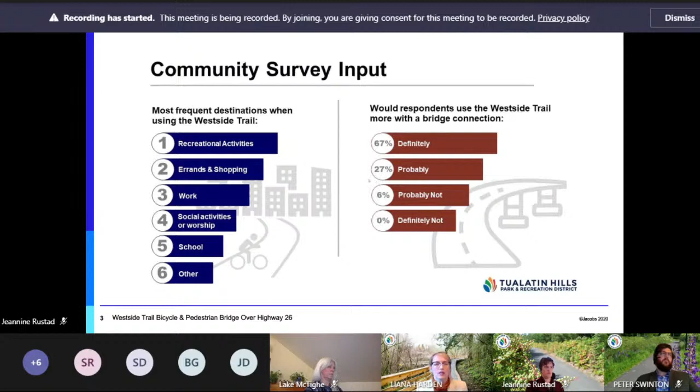Generally speaking, we didn't get a lot of negative feedback about the project itself, although we did get a lot of really good input from the community about some specifics they wanted to see if the bridge was going to be built. So it was really helpful. I would say overall, though, we did hear a lot of comments in support of the project, so I just thought I would share a few of those.

The first one is that this bridge will be an extraordinary addition to the Westside Trail system. A community member also shared that a bridge over 26 from 143rd to Beaverton could be a literal lifesaver. And another community member shared that this would be a great throughway for kids who attend Sunset High School and live on the south side of 26. So really appreciate those comments.

Not only did those comments really help inform the project, but they also helped us know we're on the right track. So as Scott moves through his slides, you'll also see some tie-in there where we heard some community input and how we're responding in the project. So that concludes my portion of the presentation.

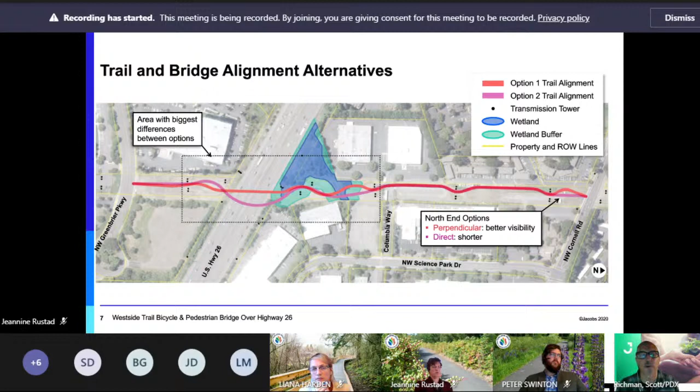So that's sort of an overview of the two options. Jeannine, if you go to the next slide, we'll talk a little bit more about option 1. I should note that the variations I talked about north of Highway 26 and also north of Columbia Way may have some refinement we can look at, but we just have these intact as options.

So trail alignment 1, we're looking at the area on top, the plan view, really looking at the crossing over Highway 26. This is all generally up on structure, elevating the roadway from grade on the south end, up on MSE retained fill walls, and then up on a prefabricated steel truss structure crossing over Highway 26, ramping down over the wetland and wetland buffer area, which would all be structure as well.

When we originally were looking at this project, I didn't realize how much structure we were talking about, and that would all be on elevated steel girdered structure, with design that minimizes the impact to the wetland areas with a minimal number of footings and locations of footings. The profile view shows that we try to maintain reasonable grades.

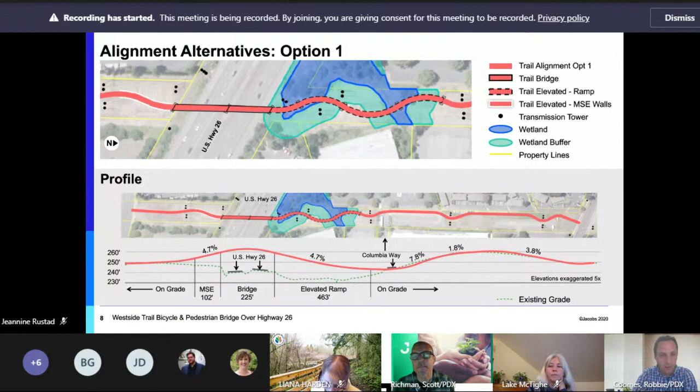And Scott, this is Robbie, I'll add on to that a little bit too. The curved option 2 also gets the majority of the bridge, the truss structure, out from underneath the power lines.

The second support in the middle of the highway and the third support on the north side of Highway 26 would both be out from underneath the power line, giving us a different option for constructability. The first option is straight underneath the power lines and would require more of a bridge launch type scenario, similar to what was just done over 405 this weekend.

From the plan view, the solid line shows the actual structure over Highway 26, and the ends of that solid line would be where those foundations would be, plus the foundation in the middle of the highway.

All right, we'll move on to the next one, unless there's another. Scott, can I jump in? Can you hear me okay? Of course, yes. Hi, so I'm Jean Senechal Biggs.

I'm the Transportation Planning Manager at City of Beaverton, and this is my first meeting of this group. I think you've met once before maybe, so I'm jumping in the middle of things. My questions are more around what's the vision and goals for the project, and how does that tie into what we're seeing here on screen for the alignment? How are we going to evaluate these, and how does it relate back to some bigger vision?

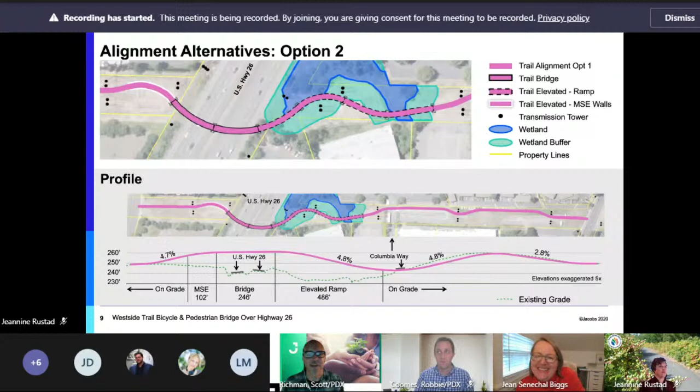Next, a private property, and the other option would stay within the BPA right of way. This gives some general parameters on differences between the two alternatives. The bridge over Highway 26 is a little bit shorter under option 1, which is straight from a bird's eye view, versus curved for option 2. The elevated ramps on the north side of the highway, as we've developed them, option 2 is again slightly longer than option 1. The retaining wall, we essentially have the same design alignment on the south side of Highway 26, so similar length of retaining walls, and then the rest of the trail.

1,570 feet for option 1, 1,580 feet for option 2, so very similar for both options. Overall, not too much difference, but option 2's overall length would be a little bit more.

I used the term MSE before this exhibit. This rendering that Toole developed shows a view from the south looking north, as the trail elevates and approaches the bridge over Highway 26. The light brown, gray colored block walls are MSE wall.

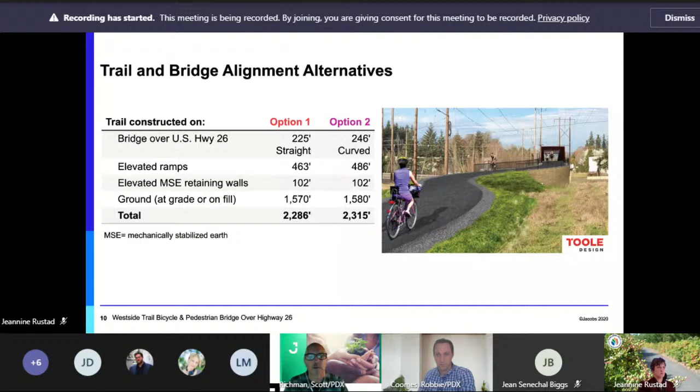We're going to get into a little more detail on design considerations. This is a Tualatin Hills Parks and Recreation District slide showing the longer Westside Trail, with this short but important link in blue. As we mentioned, it's an integral part of the trail, which is planned to one day extend from the Tualatin River to the Willamette River. It connects to adjacent trail systems that have been completed and to the broader transportation system, which is connectivity that we know is important to the region and community.

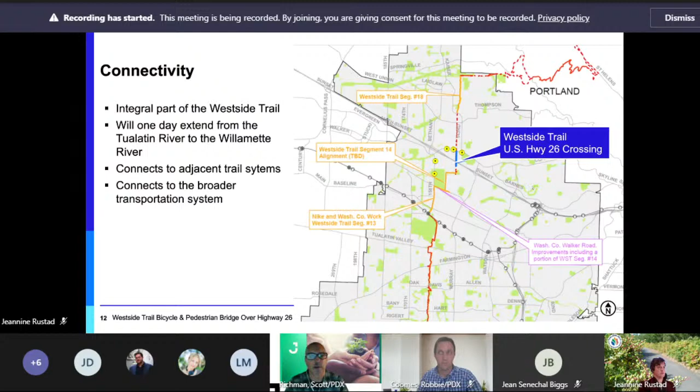One of the important elements we'll be integrating into the design as we go forward into a preferred alternative is that there are standard signs that Metro and other agencies use, and that Tualatin Hills Parks and Recreation District uses for wayfinding. The two signs on the left are signs that would be at a trail entrance or at trails for directions where there are crossings. The sign on the right is a Manual on Uniform Traffic Control Devices sign that we've all seen around in different places.

That's a directional sign that's on-street, approaching the trail access points from the streets, which are Northwest Greenbrier and Columbia Way and Northwest Cornell. We'll resolve more of those details in the preferred alternative design.

We'll go to the next one.

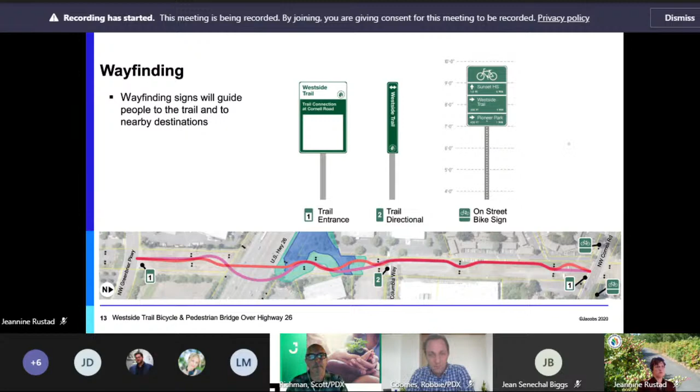I mentioned the interface between the trail and the different roadways. We know there are some potential conflict points where safety is going to be critical, visibility and signage, to alert people driving to the presence of bicyclists and pedestrians on the trail itself. The busiest roadway associated with the project that would cross is under Washington County jurisdiction, Northwest Cornell Road on the north end, with quite a bit of traffic. We'll be resolving more of the crossing details associated with the preferred alternative. So more to come, but we know there are going to be extra considerations approaching that crossing in particular. In the middle, the new trail would cross at grade at Columbia Way, which is a private access road in the Columbia Sportswear campus, so that's kind of in the middle of that.

And the intersection design at Greenbrier Parkway, the connection, which is industrial with relatively high traffic and a lot of truck traffic, and as others have pointed out, people tend to go pretty fast there. It's a pretty wide road. You can go to the next one.

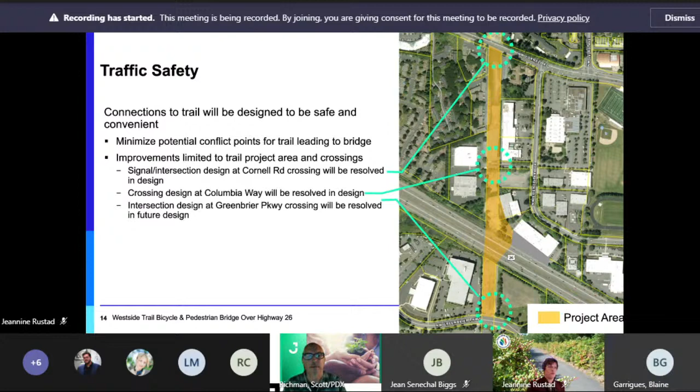Okay, thank you. All right, when we go to the next slide, this is also trail safety. This shows that the trail is going to be designed with a usable width of 12 feet, and this is the at-grade sections. There would be a 2-foot gravel or graded shoulder on each side, and then 2 feet of clear, and then 10 feet of clearance minimum overhead.

And it should be noted that we're designing it for bike movement with gentle curves, so as straight as possible, maybe some gentle curves to help slow people down, but not to restrict visibility between people walking and bicycling. And then the photo shows an example of where there's a center stripe to encourage people to stay on the right side as they're moving in that direction, and that's particularly around curves or areas where there's less sight distance for trail users.

Yeah, and Scott, just to add here, this is also partially in response to questions we got of whether we'd be separating the people on bicycles versus walkers or mobility devices. And while we can't do that, we are building in safety. Thank you, yes.

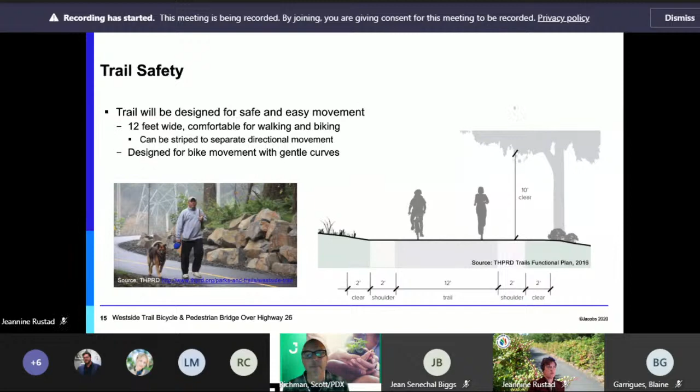Go to the next one. Personal safety, safety and security has come up. The design considerations we're promoting visibility for trail users. We know that THPRD is considering lighting on this project and in other segments that they're designing and constructing. We know that the trail itself, we don't expect any noise issues, and then construction would need to meet noise ordinances, including not being constructed near residences during normal quieter hours.

We know that the trail will, as Tualatin Hills Parks and Recreation District does for all their trails, require maintenance. There will be opportunity at trailheads, for example, for trash pickup, and then the sign example here includes a park patrol security phone number. Looks like Lake has a question.

Yeah, I just have a quick question about signage, because this Intertwine sign just reminded me. Has there been any discussions about the signage around our Intertwine signs? We don't have to talk about it at the meeting, but I know it'll come up. Parks and Nature will probably ask about it, and I know at one point it was part of the RFFA project scope that not just for this project, but the Intertwine signs were used on regional trails.

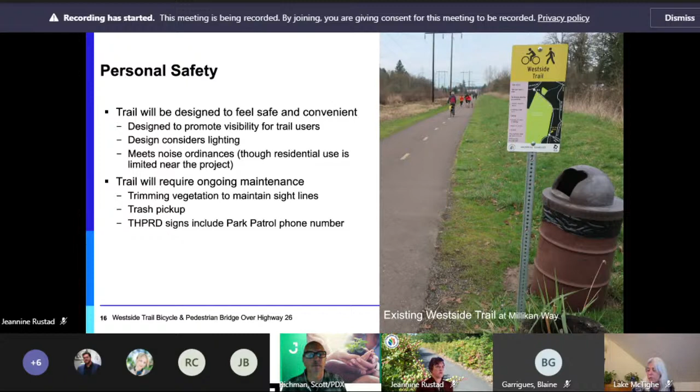As Jeannine mentioned, the project will comply with ADA standards, and that's been a key consideration in our design development. The grades will be no steeper than 8%, and that's only for short distances. Generally, they'll be kept to no more than 5%. One of the survey respondents had a question about stairs. The project would not have any stairs, so it would all be accessible.

The trail surfaces, I think this is important to mention. So the at-grade portions of the trail, and as it elevates up on fill, would be just like most of THPRD's trails are asphalt. And this photo on the top shows an example.

Thanks to Robbie, we are recommending an innovative treatment for the surfaces on the structure, at least north of Highway 26. We need to confirm whether or not the crossing over the highway itself still would need to be concrete, or if it could be this fiber reinforced polymer. This photo provides an example of that from a bridge in Virginia, which is also a bicycle pedestrian bridge, which could have a similar deck.

So these are called FRP panels. They're 10-foot wide panels that are modular. They're cost effective, relatively good for maintenance, and good for durability and anti-slip. And if there is a problem with one, they can be switched out individually.

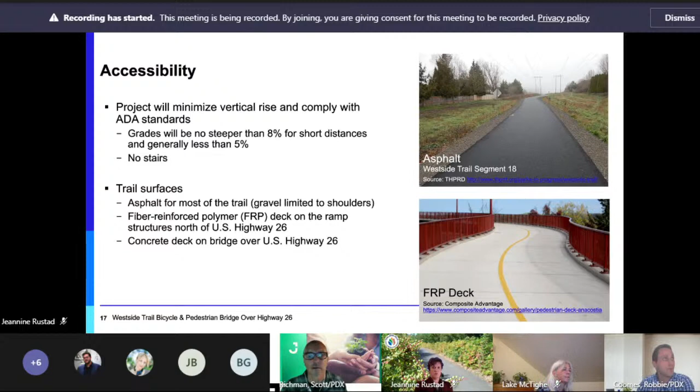This is showing some Toole Design Landscape Architects' great handiwork. This is a little bit larger view of the one shown earlier. So this shows a rendering of the approach from the south, which would be similar for both options. The orientation of the bridge crossing over Highway 26 would be different under option 2. So this is more indicative of option 1 that would go straight north-south.

This is showing the elevation of the trail up on earth fill, and then it transitioning to a retained MSE wall fill, weaving the way between the power lines and keeping the structural supports away from the gas line. I also mentioned earlier there's a fiber optic line. We haven't gotten into this detail, but there is potential, if needed, to run that across the structure itself versus impacting it underground.

And go to the next one. This is Todd, I have a question. Yeah, go ahead Todd. Has BPA looked into clearances yet? So in that photo, it looks like the transmission lines are the way they are today, but I'm wondering if clearance has been checked from top of bridge to the lines yet?

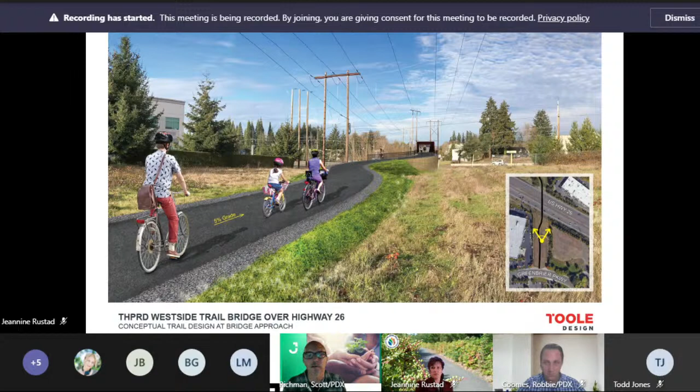Yes, please. Thank you. Thanks, Todd. You can go to the next slide, Jeannine. Scott, I think we've got a question from Stephen. Oh, all right, sorry, nope, he's signing off. Never mind. Okay, carry on.

He's signing off, but his only comment is to echo the previous comment about stubbing to Science Park Drive so that Sunset High School students who live south of the highway could more easily and directly access the high school. I suspect students will cross private property without such a stub, which may force property owners to fence their west property lines.

So I gather that that's just making sure there's a safe connection to the trail from Science Park Drive. I know there's the crossing of Science Park Drive at Columbia Way. He says stubbing, but it might be additional wayfinding, and we can work that out with him through the design process. Additional detail.

This is Blaine from Columbia. I also had the same concerns about foot traffic going down Columbia Way and then through our parking lot on the other side of the street to the school. There is a gate that allows access to the field, so I do have some concerns about that. We can meet offline too with you, Blaine. Thank you.

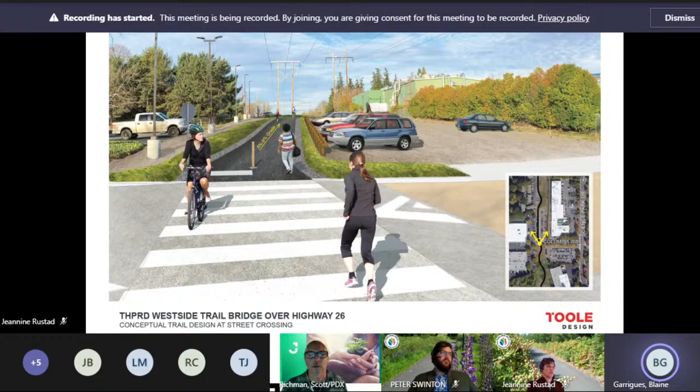I don't think we have too many more to go, but Jeannine mentioned aesthetics, and this is a couple different examples. I may ask Robbie to talk a little bit more. I talked about the type of structure crossing over Highway 26, and one of the main reasons we're favoring a steel truss is because of the grades. The steel truss allows the trail itself to be as close to the highway elevation as possible, reducing the grades.

And then there's also some constructability advantages of that. So maybe Robbie, you can just give us a little bit about the truss and aesthetics. And I think we have one more slide that shows some art examples too.

Sure. For this slide, I picked two different examples to showcase the two different alignments and some finish types that are available. The one on the left-hand side is a straight through truss. The floor of the truss is at the bottom of the section, which gives us the ability to have a lower profile going over the highway since the bridge is supported from above instead of below.

With the project we have, because we're going over a highway, we'll have throw barriers and railing on the fence as well, and we'll go into detail on that in the next slide. But this gives you an idea of what a straight truss would look like, and this one has some white paint applied to it. There's a ton of different colors that can be applied depending on the aesthetic direction of the project.

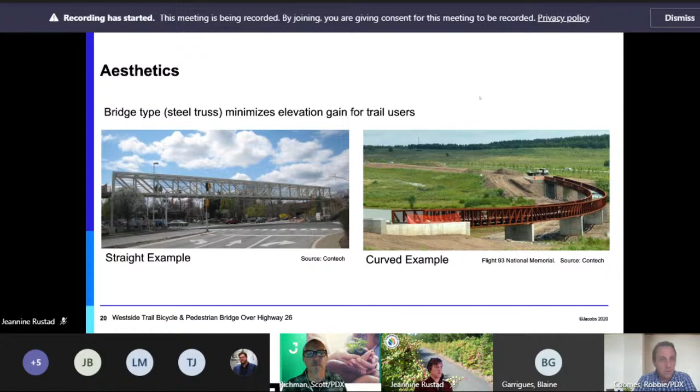It's fairly popular for a lot of trail systems, but it's not something we'd have to implement in this case if aesthetics drive towards a colored option. So that gives you an idea of paint versus the rusty orange look, and straight versus curved. You can go to the next one, unless there are any questions there.

Yeah, thanks to Robbie, this is showing some different potential treatments. There's been some interest in opportunities to incorporate art, and again that's more of a final design consideration. But maybe Robbie, you could add something about that too.

Sure. The two photos on the right are actually the same bridge, in San Jose, California. It's a prefabricated truss with a wire mesh throw barrier along the truss because it goes over a highway. But what they implemented on this one was a bit of artwork through panels attached to the bridge. The panels in this case are cherry blossoms and cherries, due to the fact that there are a lot of cherry trees in this area that bloom every spring.

So it's a unique way to add artwork in. There's been different ways they've done it. This is one example. There are some bridges in San Jose as well that have done different fish and different flora and fauna of the area.

One of the things I wanted to point out, a technology we're starting to see more often in bridges, is the middle photo -- laser cut panels. They can do it with water jets or laser cutting, but basically you take a sheet of steel and cut patterns into it to create an aesthetic, either through shadowing and light or through imagery itself. So that's another opportunity where we could have some aesthetics on the bridge.

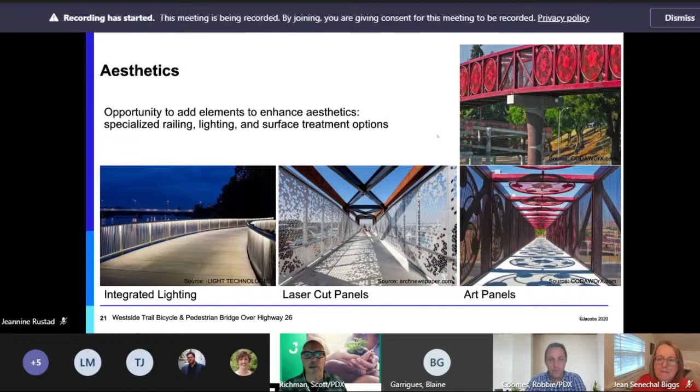All right, I think we might be down to the last slide—oh no, we've got a couple more, I think.

I mentioned this earlier, but one of the driving constraints behind the different options for crossing Highway 26 into the north is the wetlands area and the wetland buffer. We had an initial coordination meeting with Clean Water Services, who has jurisdiction over habitat, wetlands, and stormwater issues in Washington County, including this area.

We've also heard there's recognition that this area has a high amount of invasive species, so there could be opportunity for habitat restoration. Our biologists have informed me it's not super high quality functional habitat, but we do recognize it's a resource we want to try to preserve and avoid or minimize impacts to.

I should also add that one reason we need to be up on structure is not only to avoid the wetlands, but to keep the trail out of floodwater, and to not be a contributing element to increasing floods. So we need to avoid impediments within the flood elevation.

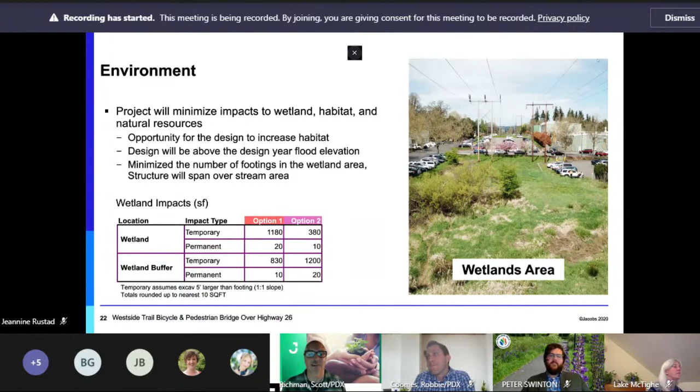Okay, let's keep going. I think this is not the last slide because Liana has the last slide, but this is one that people might be interested in. So again, thanks to Sharon and Robbie and our design team. I should add that we are talking about preliminary options, but we know enough to at least have some planning level cost ranges. So there are a lot of variables, and that's why you're seeing about a $4 or so million range at this point.

As Jeannine mentioned at the beginning, part of our charge is to develop a cost estimate. So while it's not going to be a construction level, it's still preliminary. It's going to be enough for our preferred alternative that we'll have an estimate that will be more refined. So we know that there's some details to work through to get to a cost estimate that THPRD and partners can go forward with to seek, as Jeannine mentioned, may include the need for some federal funds going forward. In addition to avoiding, minimizing impacts to wetlands, we also recognize that we're trying to avoid the need to

acquire private property. Option 2 does skirt the edge of a private property, Tualatin Hills Parks and Recreation District. We'll be working going forward right away on real estate, but that's another consideration if that option goes forward, that we'll need to consider for getting through that acquisition and the costs associated with that. And then, of course, we're well aware of the existing utilities and the need to coordinate going forward with BPA and PGE and other utility providers.

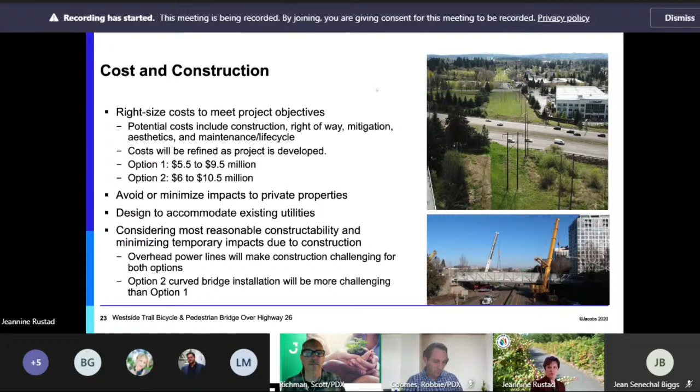So what was the final usable bridge width are you now assuming? Based on your feedback from our last presentation, we showed 10 feet, 14 feet, 12 — that's what we showed. It's the 12 foot walkway/bikeway over the bridge and structures, but we also need to account for drainage off the structures, which takes a little extra width along with the safety railing. So we'd have a clear minimum width of 12 feet. We're actually at 14 feet in the concept right now, clear, and vertical clearance on the truss is 10 feet.

So as facilitator, I'm just going to check in. I want to ensure we leave space for the community questions that came up, which we've committed to responding to for our stakeholders. I know you have lots of great questions, so I don't want to cut you off too soon. If you have further questions, please continue to email those to us, and we can follow up one-on-one.